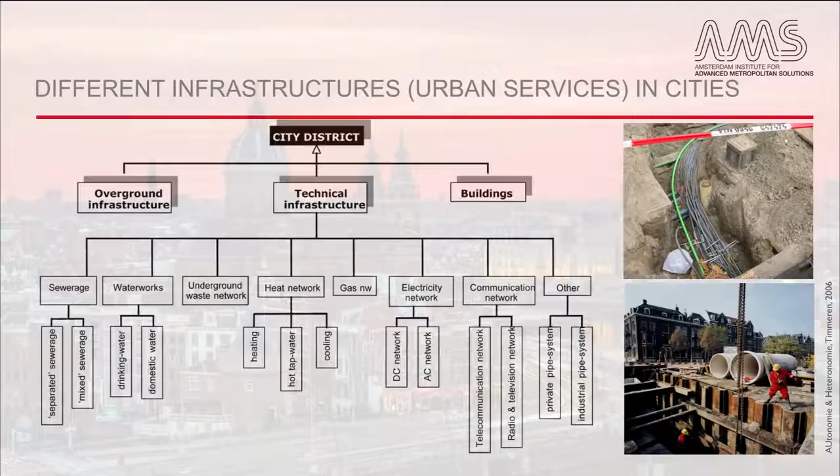As you see, the technical infrastructure includes many different fields. For this introduction to the theme of urban services and infrastructure, we will stick to the three main flows related to the physical or technical infrastructure, which are energy, water and waste. The energy infrastructure in general is subdivided into electricity, gas, direct energy carriers like liquid fuels, and indirect energy carriers like hot water or in some cases cold water for cooling.

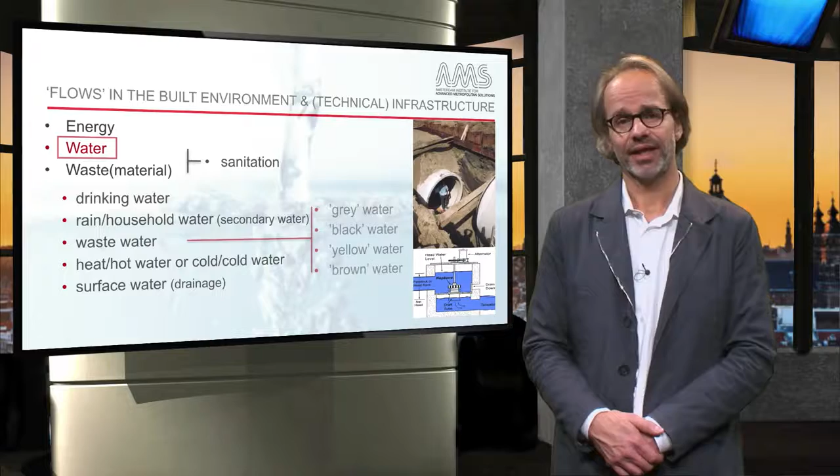The water-related infrastructure concerns supply-related water flows like drinking water and secondary water, but also wastewater. Waste and wastewater are often referred to as the sanitation infrastructure, as they are literally connected to the healthy living environment.

Wastewater is often subdivided according to different qualities or separated wastewater streams. It can be grey water, which concerns all wastewater except toilet wastewater, black water, which is the toilet wastewater, while yellow and brown water concern separated urine and faeces flows. But here also hot water and surface water flows are included as part of the water infrastructure.

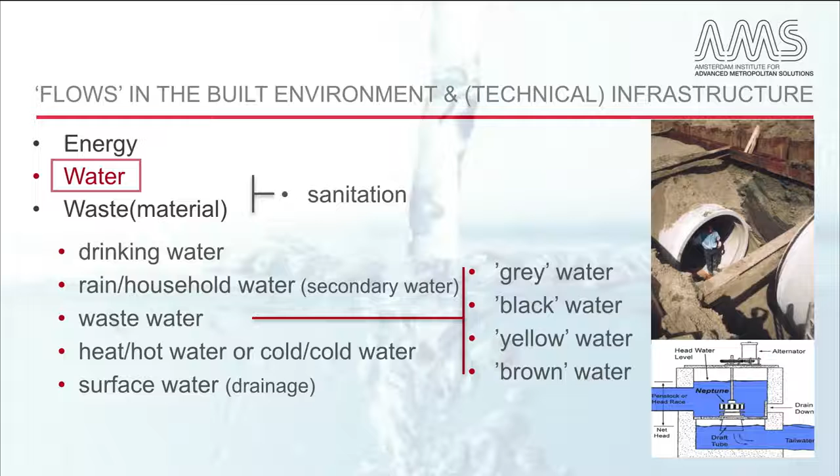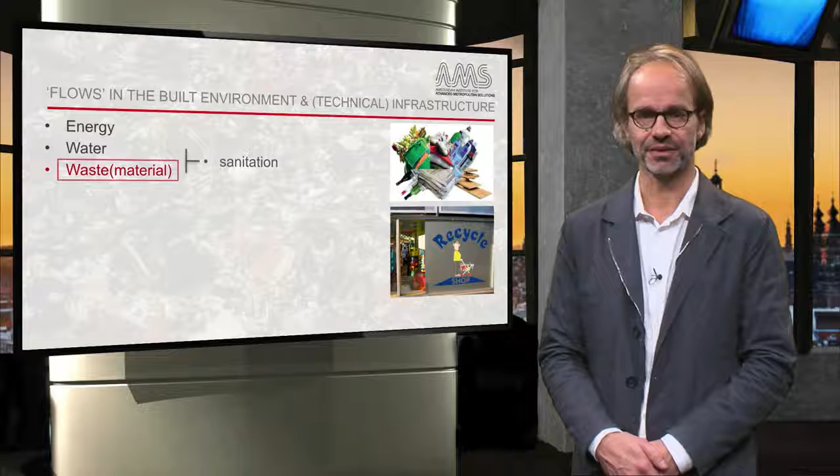The third group, waste infrastructure, includes different solid waste fractions, often subdivided into organic and inorganic waste flows, but also into mixed or grey waste and residential versus industrial waste.

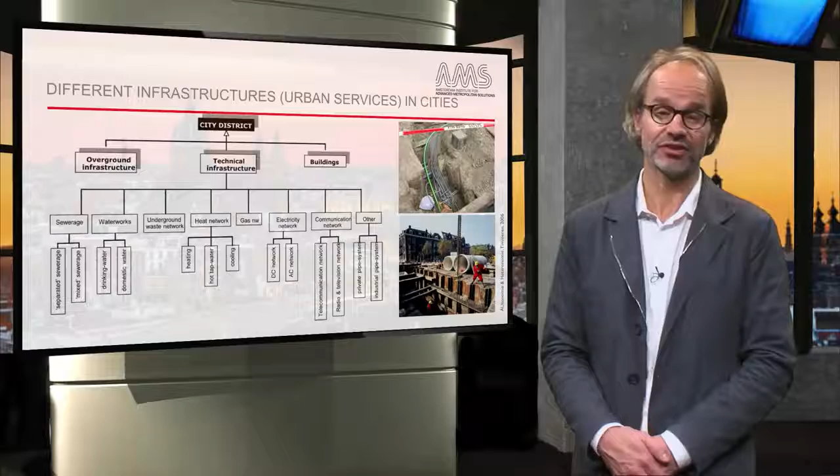One of the challenges of metropolitan areas nowadays is that these different technical infrastructures are often interrelated or even connected with one another. Also, due to the before explained subdivision for different qualities of energy, water and waste flows, this infrastructure gets more complex near to users and their connections. This makes it more important by the day to be aware of these interrelations. José Ortega y Gasset stated that for that reason, to be an engineer it is not enough to be an engineer.

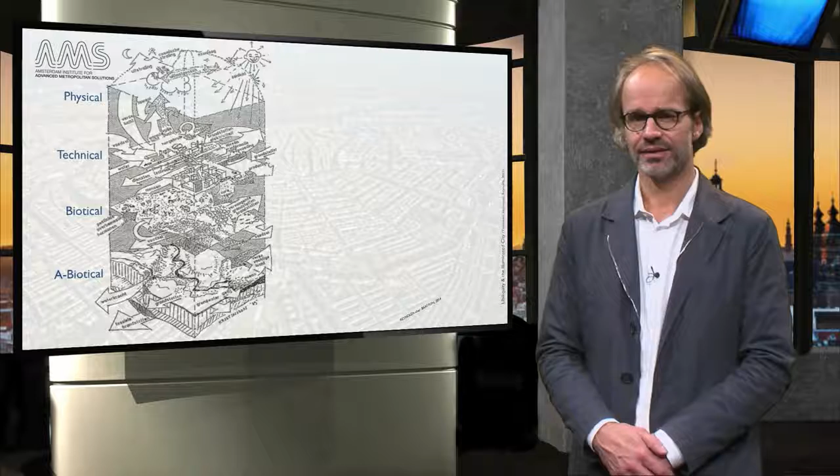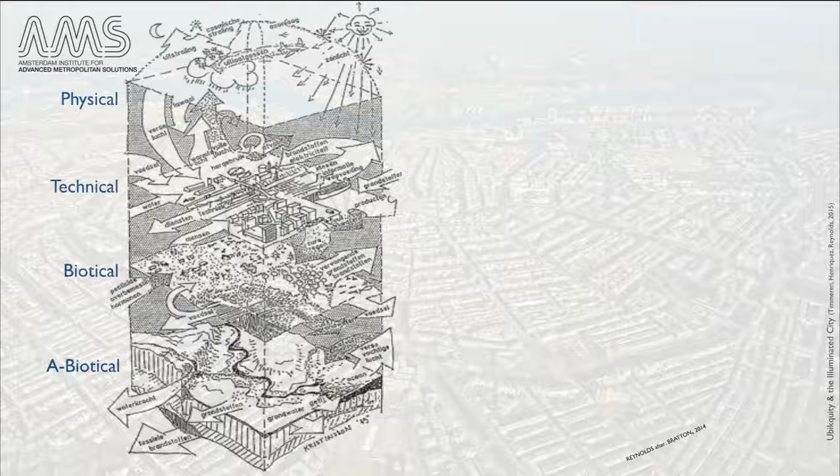Within this context of further complexity come new dimensions due to data and ICT. Ecologist Eugene Odum once subdivided our environment into 4 layers. The bottom is the abiotic layer, then the biotic layer, the technical layer and the physical layer on top. Buildings and infrastructures are part of the third, technical layer.

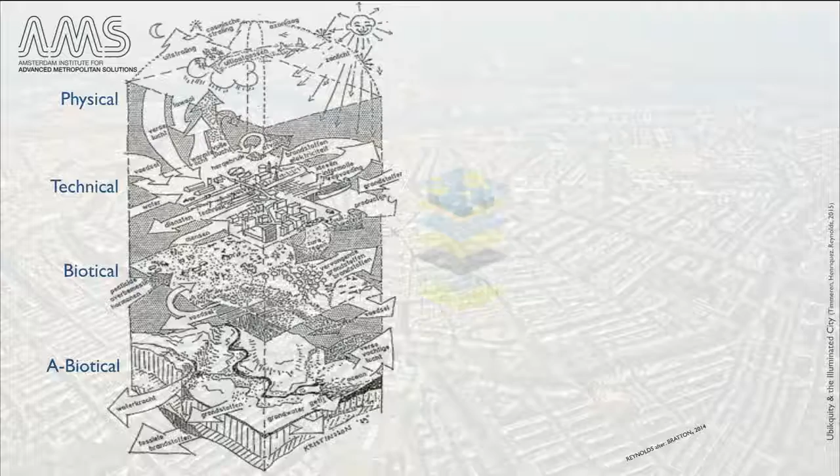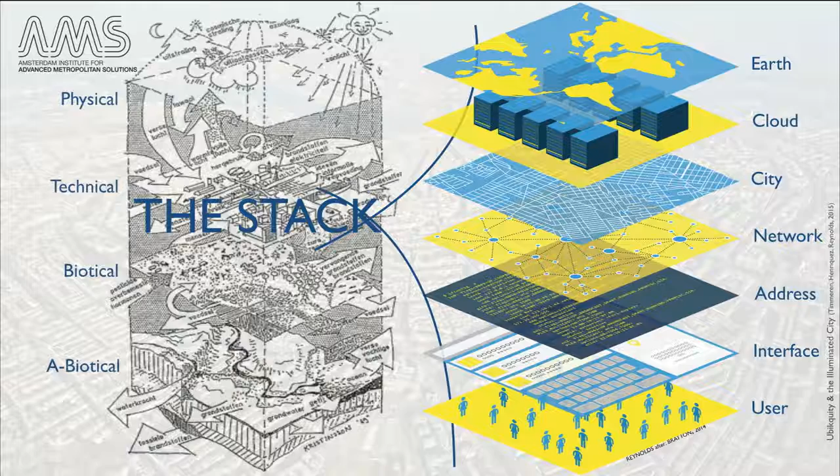Due to ICT, this layered setup is not anymore, by definition, location fixed or vertically aligned, as shows Benjamin Bratton's subdivision of ICT-related infrastructures within this technical layer, which he calls the stack. This stack implies that nowadays it is no longer a strict rule that a person is literally connected by an infrastructure to his or her direct neighbor.

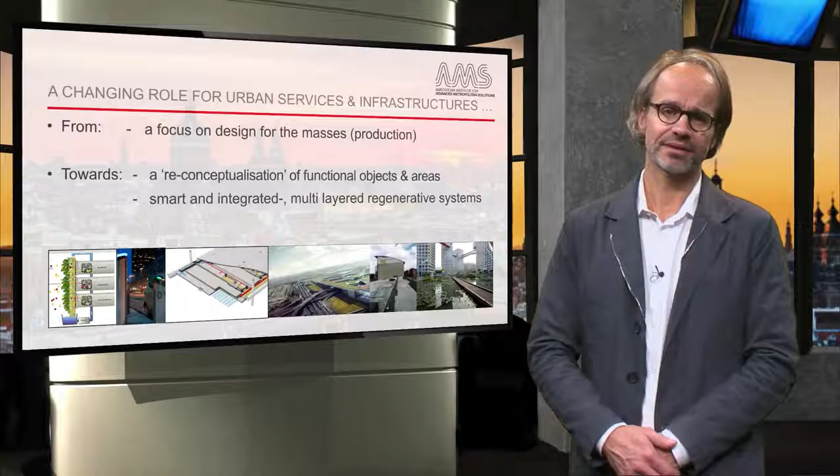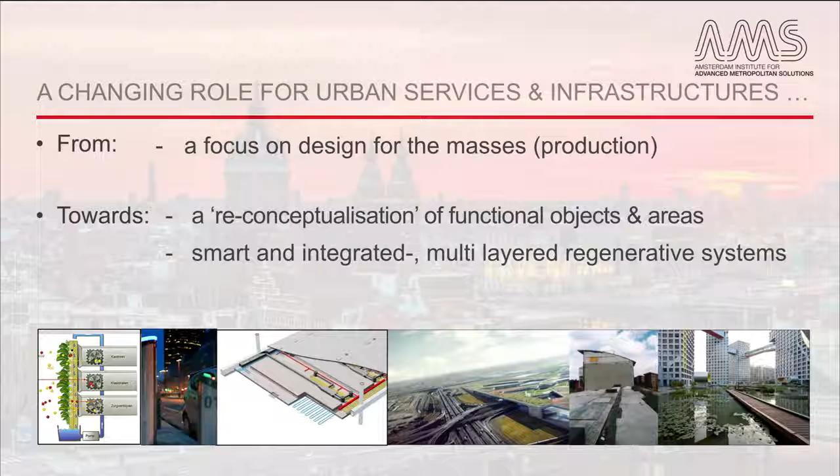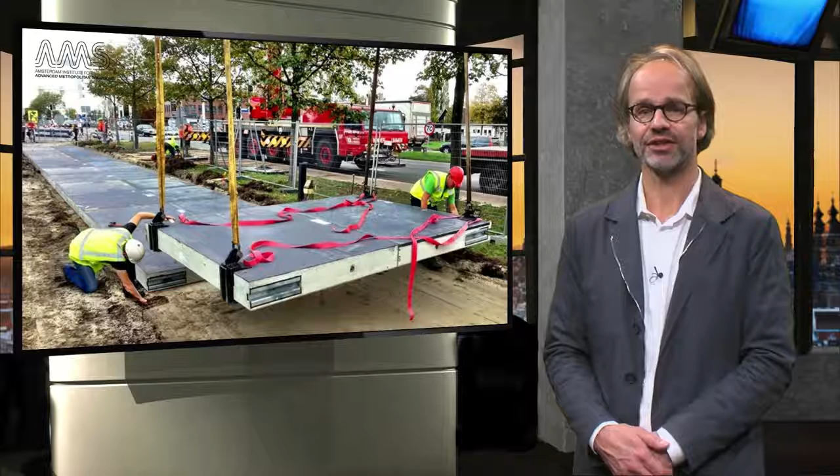These developments regarding urban services and infrastructures support the shift from a focus on the masses and supply of fundamental services towards new forms of personalized supply, integrated and smart, often multi-layered and potentially regenerative systems. Such opportunities for metropolitan solutions at different scales and regarding different infrastructures or combinations of them, like here the example of a solar bike road in the Netherlands, will be the subject of the coming weeks regarding this theme.